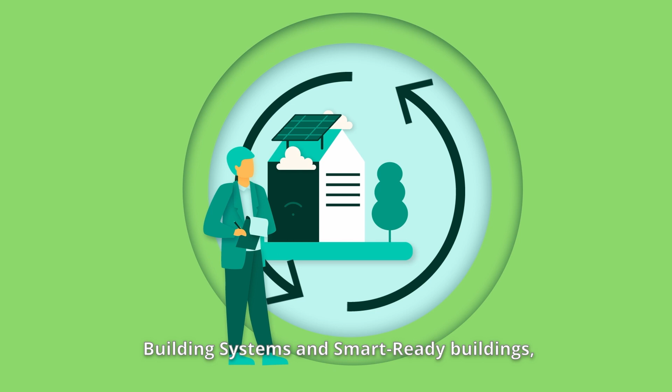Response aims to establish a strategic vision for smart cities' energy transition in a way that can be affordable, secure and sustainable. Response solutions are comprised of 5 pillars. The first pillar involves the demonstration of energy-efficient building systems and smart-ready buildings. For example, the energy consumption for cooling and heating houses will be lower.

The second pillar involves the decarbonisation and smartification of heating and cooling networks. The third pillar deals with heat storage, providing flexibility to the electricity systems. The fourth pillar is to use information and communication technologies to manage energy, e-mobility and e-governance. The fifth pillar tries to engage with the population to actively participate in moving towards resilient and safe cities, enhance citizen participation and raise awareness, and also improve the resilience of cities, social justice and security.

Dijon in France and Turku in Finland are the lighthouse cities for this pilot project, which will have a duration of 5 years. In both cities, the project will demonstrate various solutions. The solutions implemented in the lighthouse cities, Turku and Dijon, will be replicated in the project's fellow cities: Brussels, Zaragoza, Botoșani, Ptolemaida, Gabrovo and Severodonetsk.

In 5 years, Response expects positive impacts in the lighthouse cities as a result of decarbonisation. It's expected that greenhouse gas emissions will be reduced by 40% by 2030 compared to 2020, and by 85% by 2050. The increased use of renewable energies, waste heat recovery and storage solutions, including batteries, and their integration into the energy system, will improve energy efficiency and air quality.

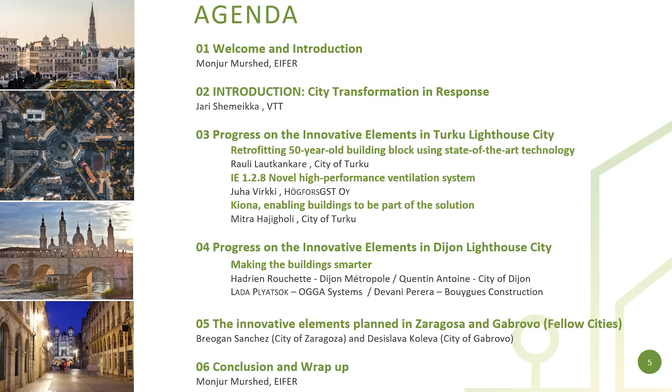So my name is Jari Shemeikka, and I'm from VTT, which is one of the partners in this response project. I was a task leader when we reported this master planning of these building solutions. Next slide, please.

I will repeat a little bit what the video had already shown. The only thing you really need to remember is that this kind of city transformation, when we are making carbon reductions and everything, it's not just the technical things. They are important, but there is always the citizen focus, because these are the cities where people are living, their living environment, so the engagement of people is really important. Also the policy and regulations are things that need to be considered—should we change something, what should be done better—and that kind of thing at the city level.

Then we're talking about smart city transformation. Smartness is usually something digital, usually city information platforms, digital solutions, communication across boundaries, because traditionally cities have been silo organizations where each has their own things, and usually the ICT systems don't talk to each other—that's one of the targets when you make better cities. Finally, the business models are important, so that beyond the project it's not just a demonstration. There has to be real good business for the companies for the coming years after the project.

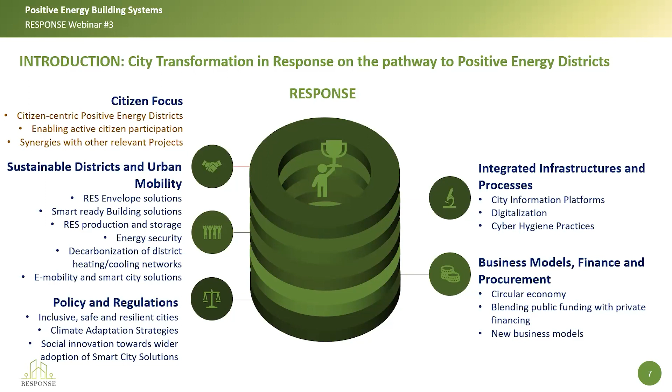This is how this mindset materializes in the response project. As mentioned, we have this transformation axis—lots of acronyms here, but these show how it's materialized at the project level. The first three, TA1, TA2, and TA3, are the technical ones. Then comes the digital solution, TA4, and the citizen engagement and that kind of thing in TA5. All of these contain so-called integrated solutions.

Today we are focusing on that red rectangle, TA1, positive energy building systems, which contains building-level renewable energy production. That's one topic. Then we concentrate on items related to, for example, deep renovation—what to do to lower the demand. There are two things: increase the renewable production and minimize the demand. These are two tools to handle the positive energy districts.

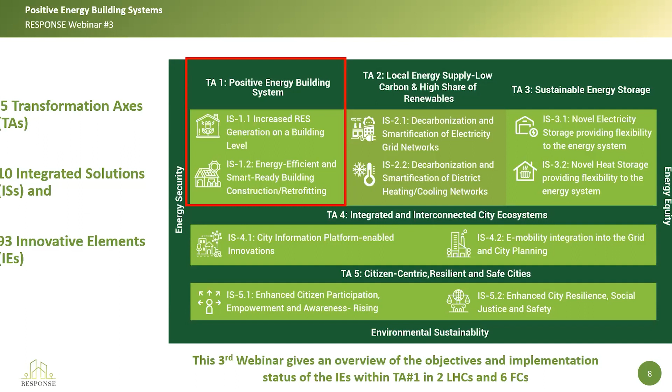Now we can continue with a deep dive into TA1. Next slide, please. So what is TA1—this transformation axis, this slang of the response project—positive energy building systems? What are we doing there in practice?

The target is to find high energy efficiency at the building level, but also remember that good indoor climate is really important for the people living in the buildings. We are not building buildings for technology's sake—we are doing those for the people. In Turku, we are making a new building which is highly energy efficient, and deep renovation activities, which the next speakers will drill into in real detail, showing how it's been done with these innovative elements. But mainly, at the building level, it's about how you do renewable energy production.

Solar systems are close to commercial or fully commercial solutions nowadays, so that's what we do here: increasing renewable energy production, deep renovation activities such as better insulation, better windows, and fancy exhaust air heat pumps, which are quite common in Finland. Smart digital solutions are used for better control of the indoor climate when people are present or absent, optimizing energy efficiency while securing good indoor climate for people. The next speakers will tell you more about that. Next slide, please.

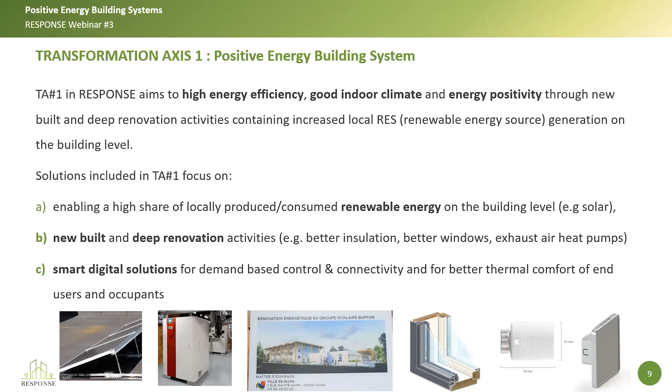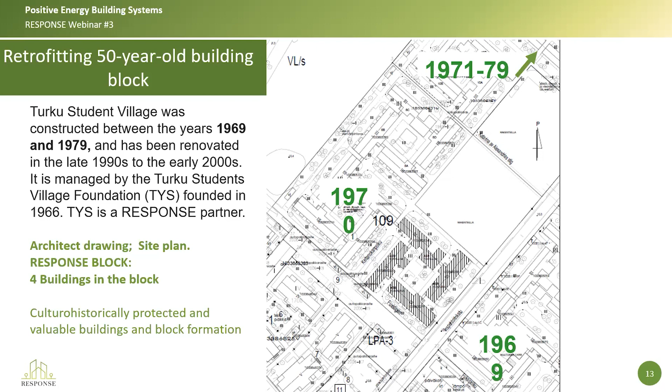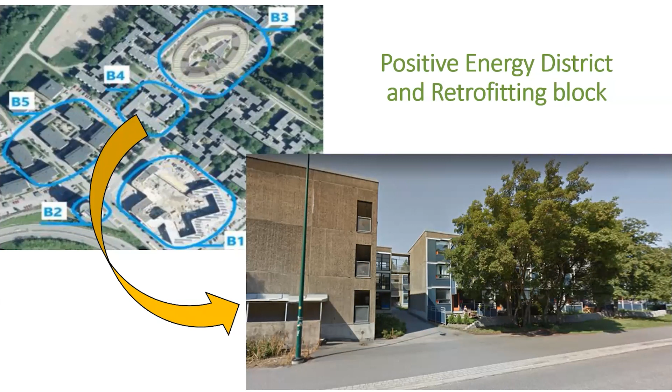Next slide please. On the left side, you can see the whole positive energy district, where the Response project targets all the actions, and B4 represents the 5th block buildings in our demonstration area. On the right side, a picture in situ - buildings have 3 stories. Next slide please.

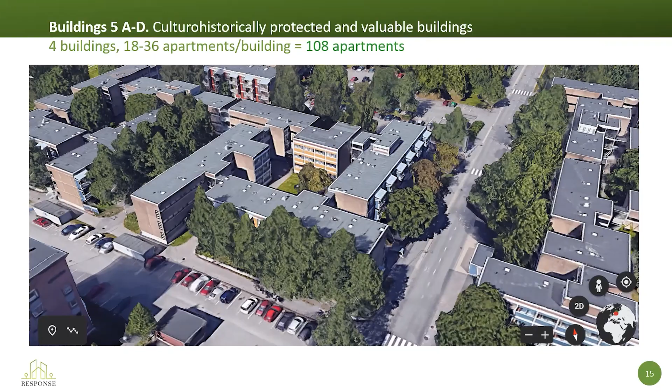Next slide please. Retrofitting solutions are gathered here. There are 4 main solutions presenting state-of-the-art technologies, and 1 conventional retrofitting solution module.

The first innovative solution is nanocoating four-glazing windows provided by partner Ruhkala, a Finnish window company. The second is a novel high-performance ventilation system, which will have a detailed presentation after my part by Högfors GST. The third solution is novel human thermal sensation control, which will also have a detailed presentation by partner Kiona. The fourth solution is self-sufficient IoT thermostats. The fifth is conventional retrofitting, including water-saving taps, extra insulation to the roof, urethane sealings, mainly tightening and sealing wall connections, and PV panels on the roof.

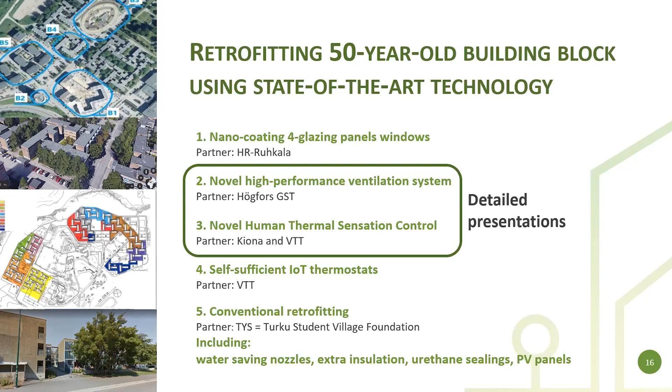Next slide. The first solution to present in our demo buildings is nanocoating four-glazing windows. They aim to increase the energy efficiency of the existing buildings. Top-class energy-efficient windows have 65% better insulation value than the existing windows. The nanocoating forms a frost-free outer glazing and visual comfort for the resident.

The state-of-the-art energy efficiency of the window provided by partner Ruhkala is based on the thermal break used in the exterior frame and the glass structure offered by modern glass technology. The thermal break and current selective glass coatings have improved the U value, the insulation of the window, by about 30% compared to previous 4-glass window generations. The expected installation time is 1 workday per apartment in these 5th block apartments. After Response retrofit, the windows' thermal insulation is even better than the walls have, because the walls are still 50 years old.

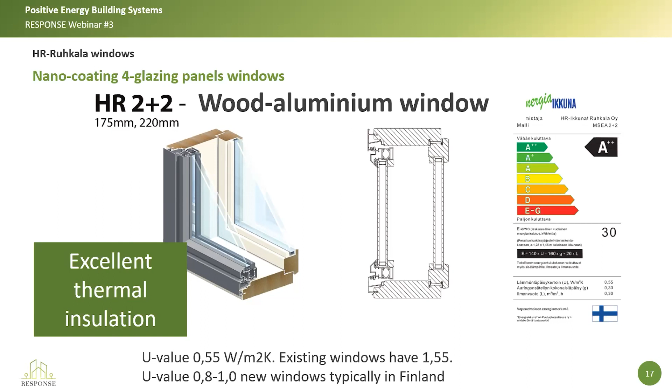Here you can see the situation picked last week. Windows have been replaced in half of the apartments. After the window renovation, energy is saved 65% compared to old windows. Savings per window might be small, but after replacing all 250 windows, the impact grows respectively.

Considering the situation and impact, if all the 91 buildings in this area built in the 70s would have these windows, or 1.2 million Finnish small houses and 300,000 other buildings have these high insulation windows, that would make a difference. And of course, buildings in other subarctic countries as well.

I want to emphasize that even small improvements will carry us closer to a better future, because they are drops in an ocean that can be multiplied and scaled billions of times.

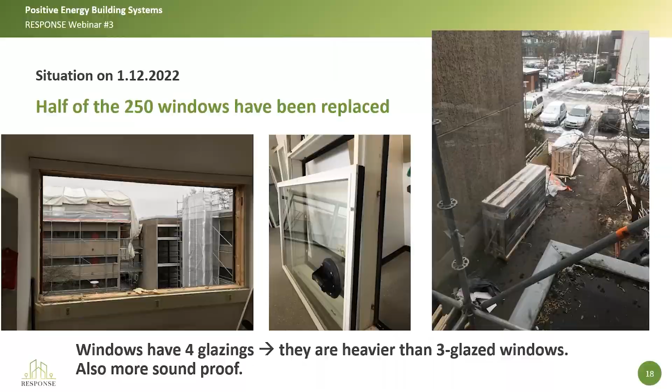Here's some facts about the company Ruhkala that provides the state-of-the-art windows. Ruhkala was founded 65 years ago. It is located in middle Finland, as you can see from the map. They have 26 employees and they manufacture 20,000 windows a year. So it's a small size company that provides excellent windows with an affordable price.

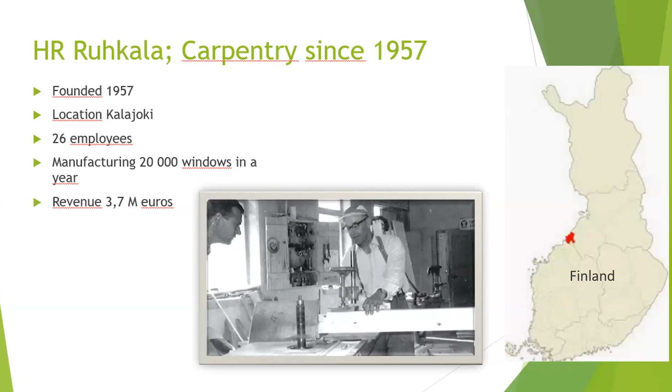The Student Village Foundation has made some conventional retrofitting with their own funding, at the same time as other renovation measures. Here you can see work done adding insulation on the roof. On the left side, before the extra insulation; on the right side, after the insulation work.

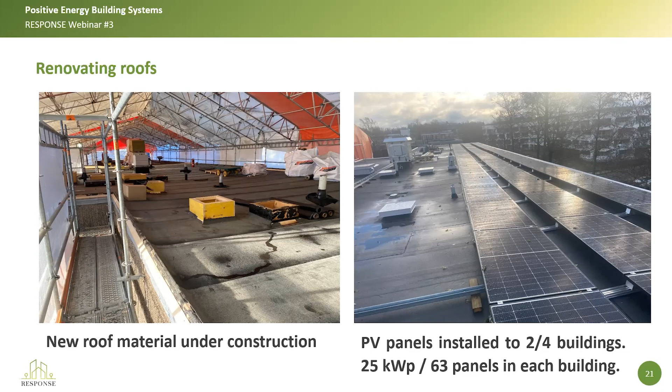Thank you, Rauli. I'm trying to start the video, but it doesn't let me. Just a second. You can't start your video because the host has stopped it. Okay, I can go without the video then.

Welcome to you all from my side as well. Do you hear me? Is the line okay? Yes, we do. Okay, thanks. So you have my show over there. Do you have it? Should I share it myself? No, it's displayed, you just have to ask to change the slide. Okay, you can change the slide.

My name is Juha Virki and I'm representing a company named Högfors GST. Today's topic is the high performance ventilation system. I have roughly 9 minutes to get through it, so I'll try to be as fast as needed.

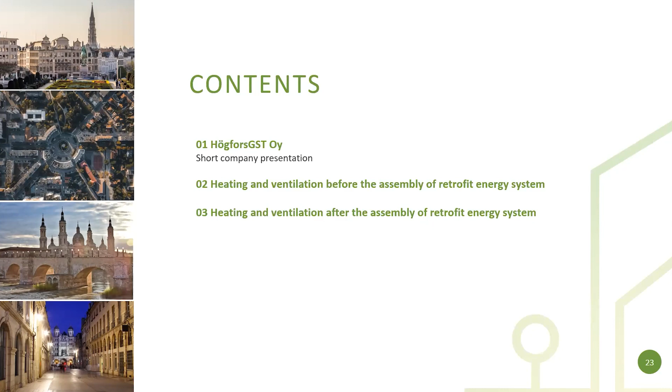A little about us: we are a factory located in Leppävirta, and we export district heating and cooling subcentrals and hybrid solutions to Sweden and Norway, as well as producing them in Finland. We have about 150 employees and turnover is about 30 million.

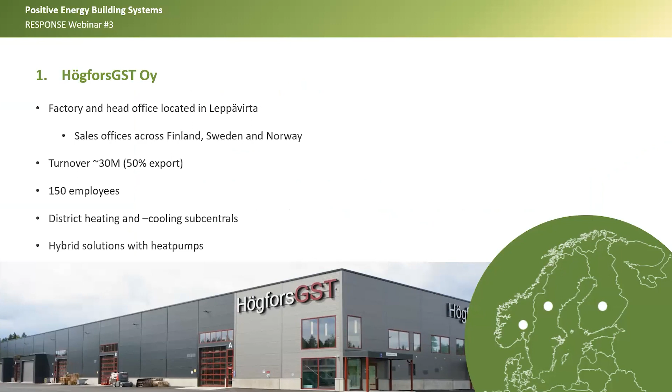The situation before renovations, as Rauli said earlier, is that these are old houses and the typical ventilation is like this: we have only exhaust air ventilation. In this case we have one of those on each of the building rooftops. And when we have only exhaust air ventilation, the inlet air comes via vents which are on the rooms.

The problem is that when we have, for example, minus 20 degrees outside, the temperature coming into the building is at the same level. And of course this gives big energy losses and lower living quality.

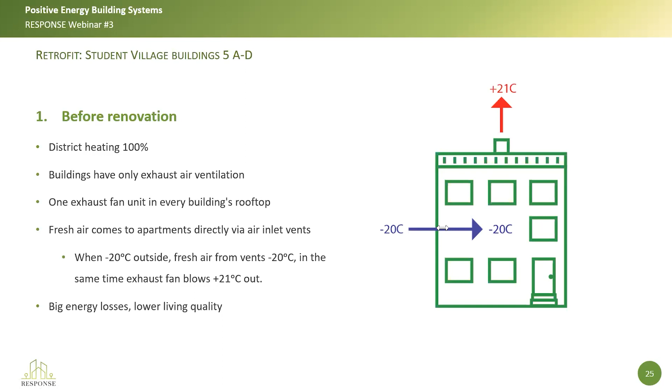And what we are now doing is trying to change this. Let's go to the next slide.

Instead of taking the cold air directly from outside into the rooms, we are heating it up with inlet air units. That means when we have minus 20 outside, we can still blow, for example, plus 18 inside the building. That gives much better living quality.

At the same time, when before we were blowing out this plus 20 degree air, now we can blow much, much colder air out. That means when we take the heat out of the leaving air, which was plus 20, that results in a lot of energy savings.

In the upper picture you can see, well, we have quite cold temperatures here in Finland, this is something we can have. This is when the normal ventilation, between the inlet air unit and the exhaust air unit, is working only without the heat pump.

But when we have higher temperatures outside, for example plus 10, then we can bring the heat pump into the system to give a boost for the ventilation and for the recovery operation.

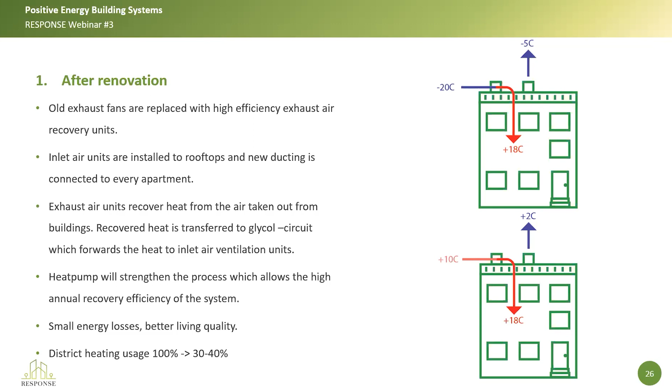This gives smaller energy losses and better living quality. It also has the possibility to cool down the inlet air when we have hot outside temperatures, but in this case we are not using it because of the ducting. If we should use the cooling, we should have different ducting inside the building, so in this case it's not possible.

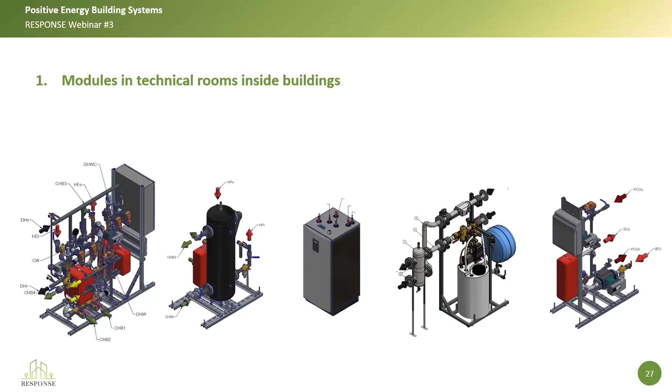Then we have the ventilation units. There was a picture in Rauli's presentation where you already saw one of those exhaust air units. This exhaust air unit cools down air that's going out from the building. Normally when we have plus 20 degrees inside air, it cools down to minus 5 when we have cold outside temperatures, and when we have plus 10 outside, it cools down even lower than that outside temperature.

For example, plus 2. And on the right side we have the inlet air unit, and this is the one that heats up the air coming inside to the building.

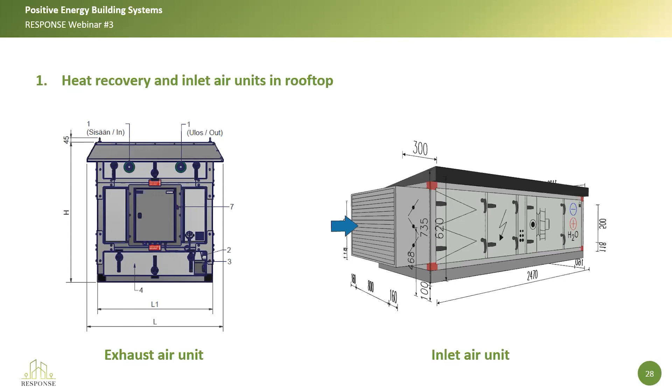When we have a lot of different modules, heat pumps, heating circuits, ventilations, etc., we have to have a control system that can control everything. This is something that we are doing as well in our factory, and when I talked earlier about the factory testing, this is a big part of it, because before we send the products to the site, we test everything including this Fiksu system as well.

So actually the automation is working already before it's installed. With this control system, we can get all the consumption reports, for example how much electricity the system is taking, how much heating power it's producing.

Everything can be controlled via internet. So for example, if you have a cell phone or computer or whatever, you can control the whole system by using those.

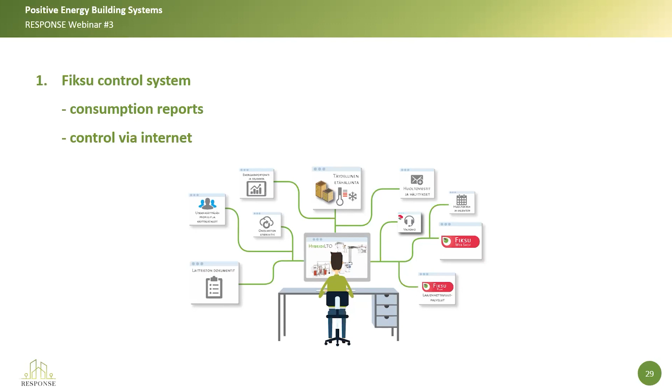This is the flow chart. It's maybe a little too difficult to explain, but just to conclude: this system is a prefabricated system in our factory, and it consists of different modules that are connected on the site. You don't need to think about every module, every product, every vent differently, but everything is already done in the factory.

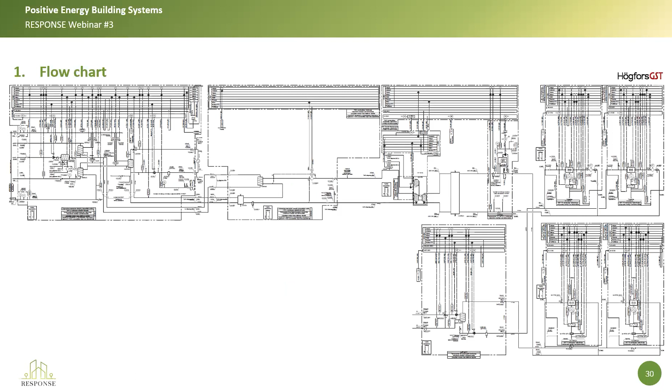Next slide, please. Oh, that was all. Thanks.

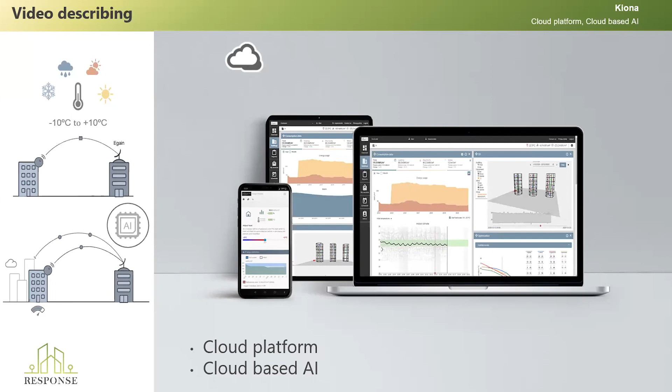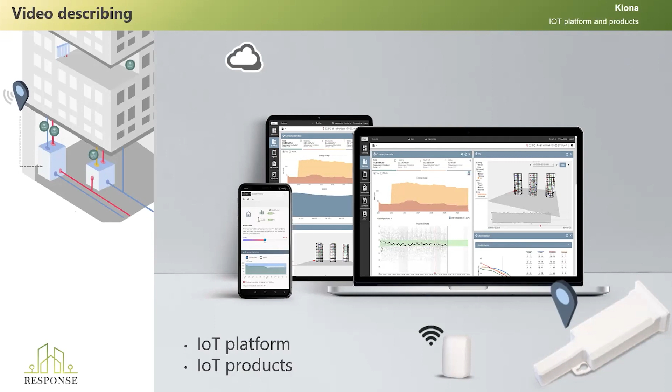Next, please. With the Edge platform, we have an IoT platform built to deliver value fast. It should be easy and quick to install, so that we can spend as little time as possible on getting started and instead deliver data and results. Kiona Edge is hardware independent and can be integrated with existing hardware infrastructure, enabling access to data without sunk cost. Next, please.

Now let me walk you through the solutions Kiona is part of in Response.

For the Response project to succeed and reach climate neutrality by 2050 in Europe and by 2029 in Turku, we need partners, decision makers, and citizens to collaborate. We need citizens to understand how much their behavior costs in money, energy, and CO2 emissions. We at Kiona believe that a knowledge platform reachable from your phone is a good tool to increase citizen awareness. Here are some examples of what it can contain.

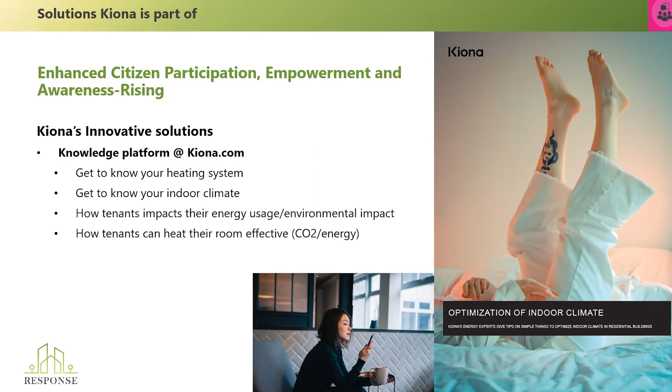To create a connected city ecosystem in the Response project, a city information platform is needed for decision makers. In this solution, Kiona will offer a dashboard to understand how efficiently the building is distributing and using the incoming heat over time. The dashboard will present benchmarking on building, but also on area level, to understand how well your building performs compared to other similar buildings.

It will also present the health of the heating central, which is based on district heating temperatures and energy consumption. And to find new, surprising, unexpected events or behavior in district heating temperatures, delta T, Kiona offers a rule-based anomaly detection tool to detect these deviating values from what is expected or normal.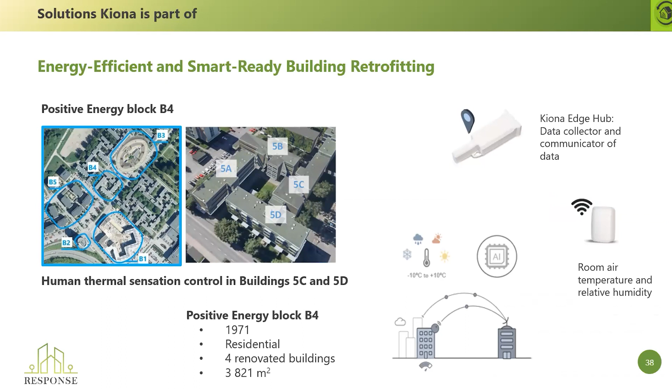The human thermal sensation control is about keeping tenants satisfied with the indoor climate. The algorithm decides the indoor climate based on body type, and uses the indoor climate data provided by Kiona.

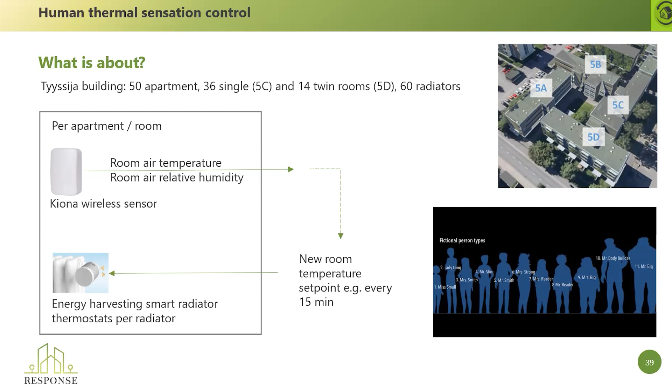However, the solution is also about optimizing energy consumption, improving our edge AI to the next generation, and cutting power peaks based on the energy tariff model set by Turku Energia. Kiona's self-learning optimization calculates the building's heat need based on the predicted weather forecast, but also on the maximum indoor climate set per thermostat. Kiona will have the final control of the indoor climate to be able to cut any power peaks and redistribute the heat over time.

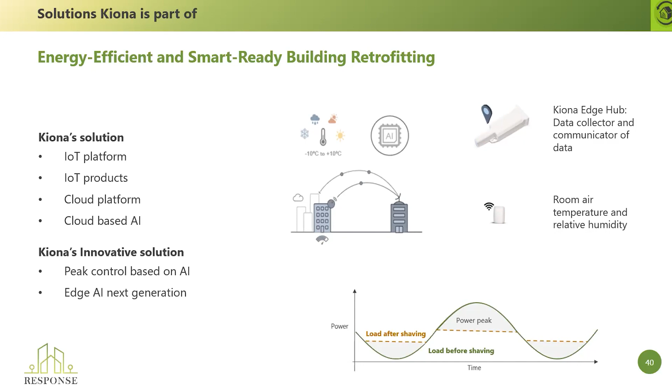And here you can see a summary of what we will develop in the Response project. If you have any questions, please write in the chat. Thank you.

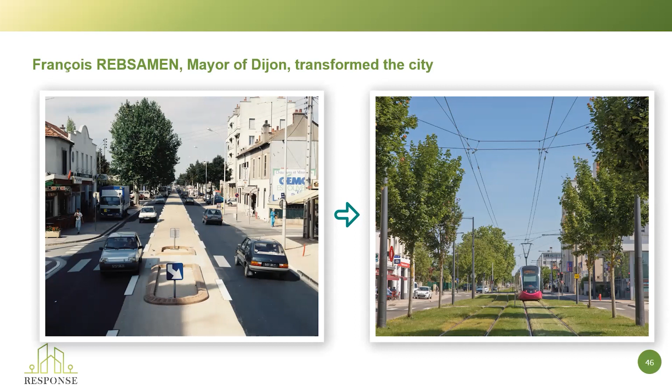Although it is rather old, it has been reinventing itself since the early 2000s. For example, we have now the tramway, we have the pedestrian zones. So here you can see the new pedestrian zone, which starts at this crossroads and goes through the district that we can see in front of us on the right side. We also installed a heating network during the very same works during which we had the trenches for the tramway.

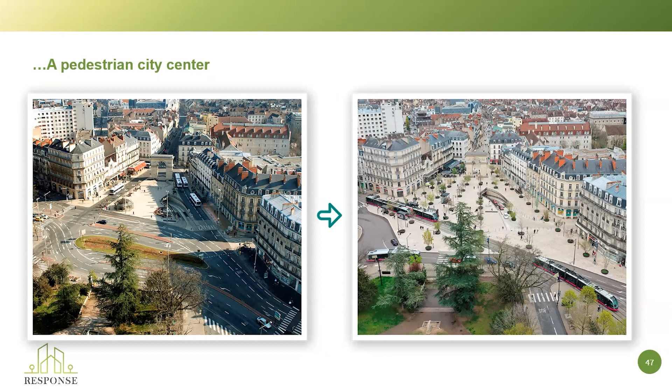In 2008, Dijon signed the Covenant of Mayors, and in 2019, Dijon voted for carbon neutrality starting 2050. So these here are the representation of the goals for Dijon. And in this scope, the Response Project is one of the testing ways for the transition project for Dijon, and the reference pilot project in Dijon for energy transition.

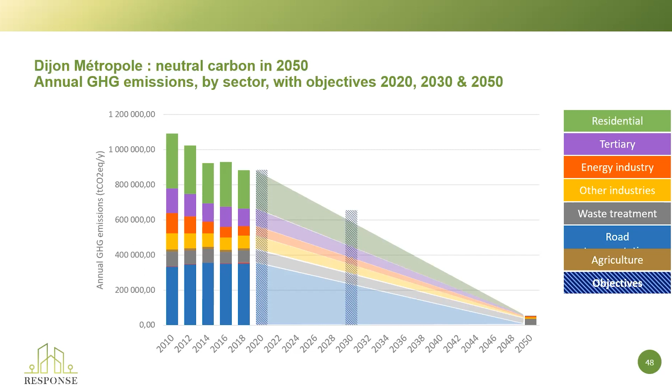For this one, we chose the Fontaine-d'Ouche district.

This district, southwest of Dijon, was built in the late 60s and early 70s, and it's called the Fontaine-d'Ouche district. It is home to a bit less than 10% of Dijon's city population, so it's not a small one. It has a particularity of hosting a relatively high level of poverty compared to the rest of the city. As a consequence, the Response project in Dijon is an opportunity to test energy transition in a district for all citizens, which is rare.

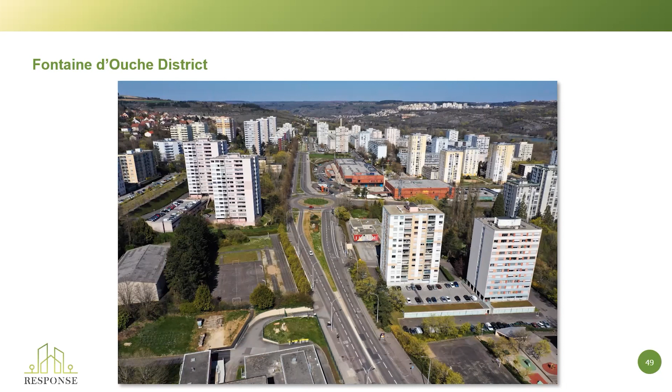The district is located next to the lake Kir, K-I-R, which is a favorable and pleasant environment for the people.

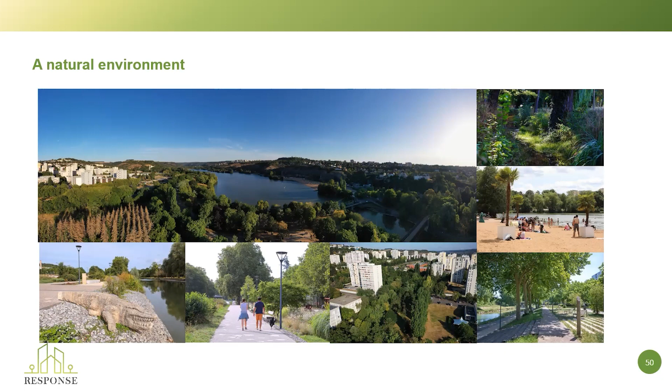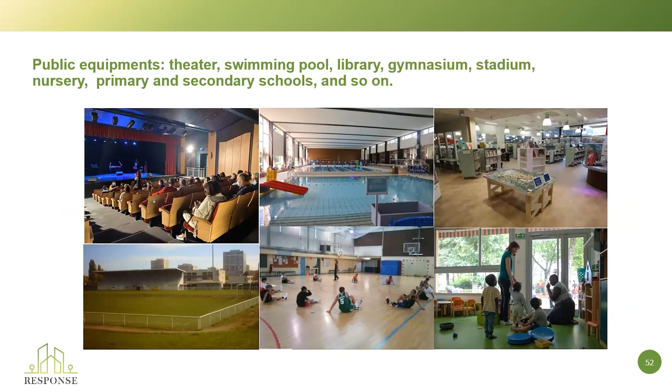The district also has many facilities in the neighborhood, for example the commercial center. In the next slide, we will see the sports center, the theater, and the swimming pool. All the buildings are heated with the district heating network.

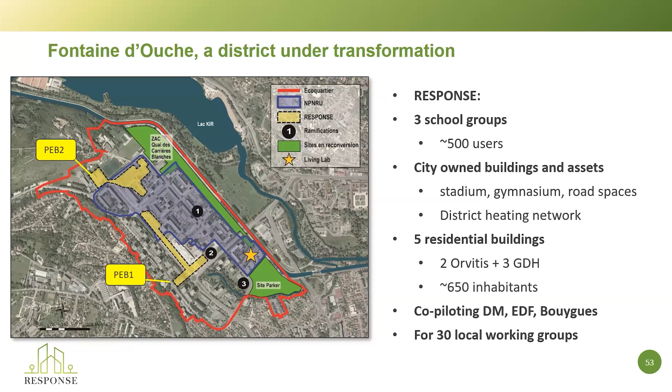Even before the Response project, the Dijon Fontaine d'Ouche district was already under transformation. This blue zone has already been experiencing transformation since the middle of the 2010s. Now we have the Response project, developing in the two yellow zones, the two PEBs, positive energy blocks. Those concern 3 schools, 5 residential buildings, 2 sports facilities, the road spaces, as well as the district heating network.

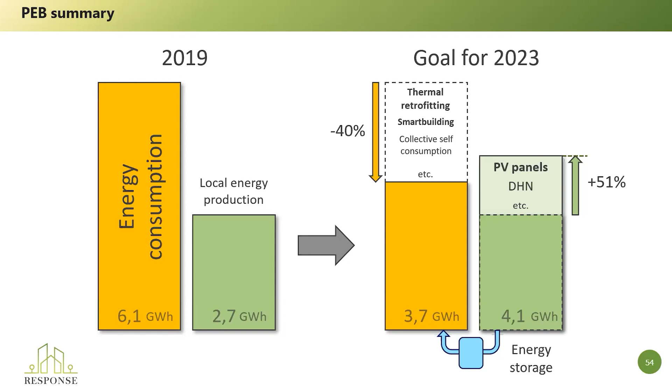The goal of the Response project in Dijon is to go energy positive. On the left we have the reference, with energy consumption and production in the district, and on the right the goal for 23-24. The first lever to reduce the need for energy imports is to reduce energy consumption directly at the root, shown by the orange bar. At the same time, it's also possible to produce energy that will be directly consumed in the district, shown by the green part with the PV panels. I'll give more information about this in a minute.

So let's go see the district. You can already visit the Positive Energy District in Dijon through a digital model available online with a link or QR code.

Let's start with the residential buildings, home to more than 600 people. These buildings are property of the social housing building owners, Grand Dijon Habitat and Orvitis, who are partners of the project.

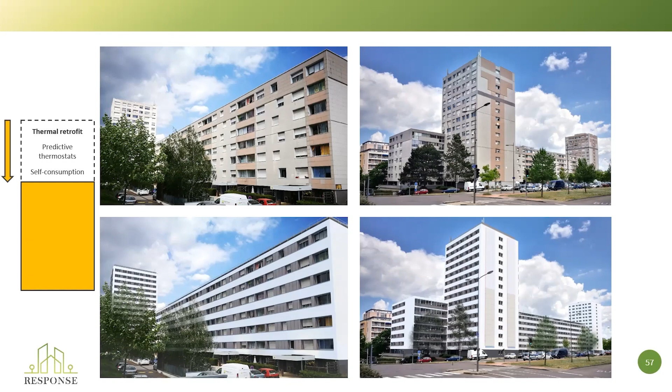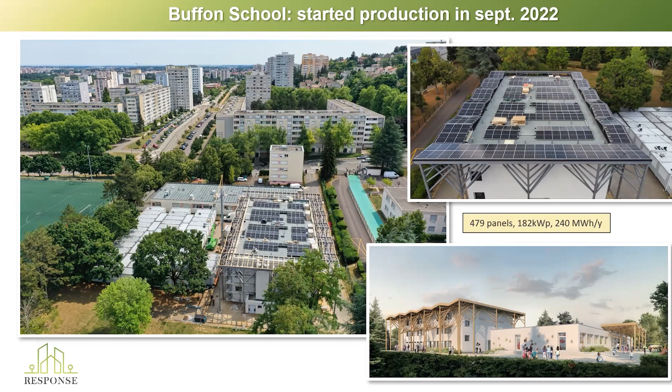It's common during the day to have more production than the needs of the school. Due to the self-consumption law set in France, we can share this electricity produced on the building with other buildings owned by the city, such as the other schools or the swimming pool. This facility has been running since September 2022, making it one of the biggest achievements of this year.

Another example is Colette School, currently undergoing thermal retrofit, which will reduce energy consumption in both heat and electricity. This school can get some electricity from the 2 other schools equipped with PV panels. As a consequence, the schools and residential buildings of the program are being equipped with these technologies, along with various smart building technologies that will further reduce the energy needs of those buildings.

So, for example, the schools will get innovative systems for managing both the heat and the air quality. Bouygues Construction Company will provide predictive thermostats to the Orvitis buildings, and OGA company will provide smart energy management systems to Grand Dijon Habitat dwellings.

So we will hear from them, because they are actually the specialists. I'm not, I'm just the project manager. As a consequence, I propose to give the floor to Lada Pliatsok for 5 minutes, about the OGA solutions that will be deployed in the Grand Dijon Habitat buildings. Lada, please.

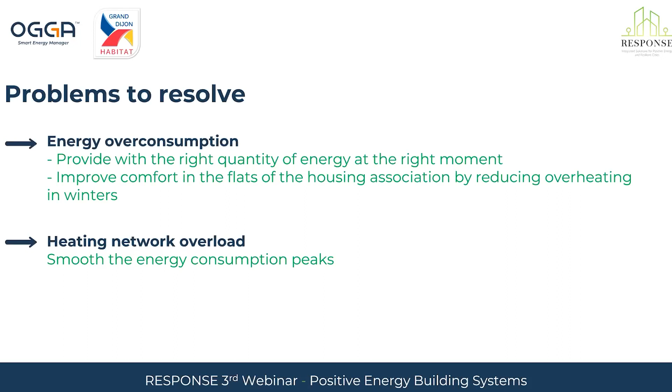In the flats, to avoid overconsumption, we will install our smart home solution EcoTouch, an energy manager. It's a small module installed in the electrical panel of every flat that measures and analyzes energy consumption and learns the habits of the people living inside. According to these habits, it automatically regulates energy consumption. To help them use the system better, they will have a wall switch to set the temperature they like, and the system does the rest.

To help us learn their habits better, and to get more energy savings, there will also be a wall switch near the entrance, a presence and absence button. When the person leaves, they push the absence button, the lighting goes off and the heating is reduced. When they come back, they press presence and everything returns to normal. The system is simple and easily used by any tenant of any age. The heating is operated automatically depending on habits and the weather, with no programming needed. Installation is very fast, less than one hour.

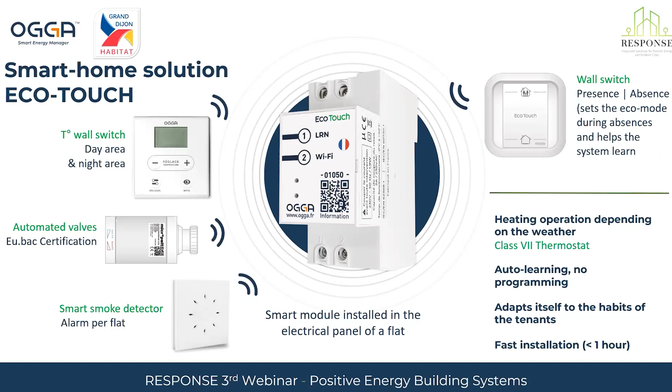Another interesting feature is the automated thermostatic valves installed on each radiator near the windows. We detect window opening, so if someone opens a window in winter, we can cut the radiator near that window, avoiding overheating. We also sponsored the certification of this valve, allowing housing associations to get significantly reduced installation costs. That's also a thing to remember.

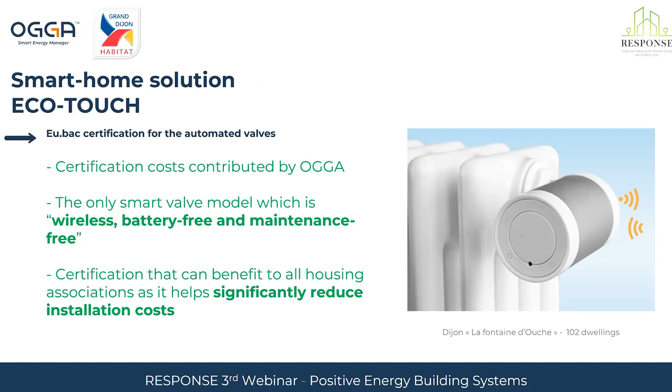So now we will be shifting to the smart building part.

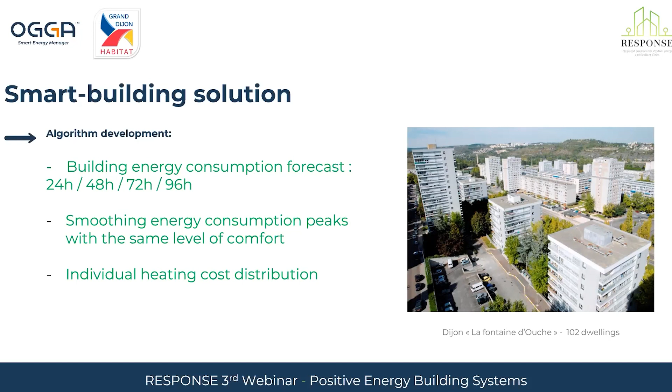The second problem will be tackled in this way. To avoid overload of the district heating system, we will be able to forecast exactly when there will be a peak of consumption, for example in 24 hours at 6 in the evening. According to that forecast, we will smooth energy consumption by telling the systems in the building to launch the heating a little earlier or later than the peak, so we can smooth the peak and avoid launching another power station. So I think that's all for me for now.

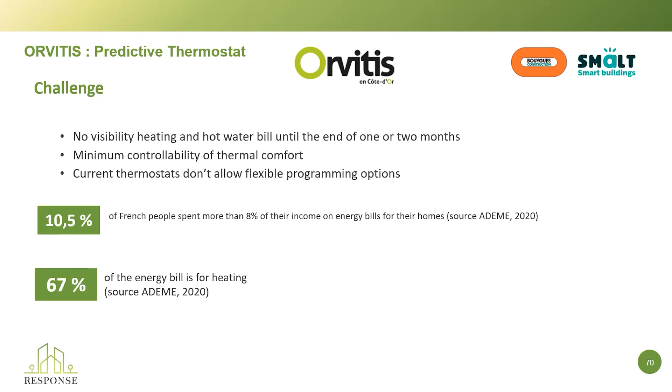So by having better visibility on our energy bills, what we would like to do is give controllability and reduce the energy poverty that is getting more and more common today, and of course do all this with a user-friendly interface, so that it's a solution that can work for people.

If you get into the details, it's a little different compared to the other solutions presented here. There is an algorithm that predicts the user behavior. The network gateway collects all the data, and using artificial intelligence and an algorithm, it is able to predict user profiles, which then provide us with their impact on energy.

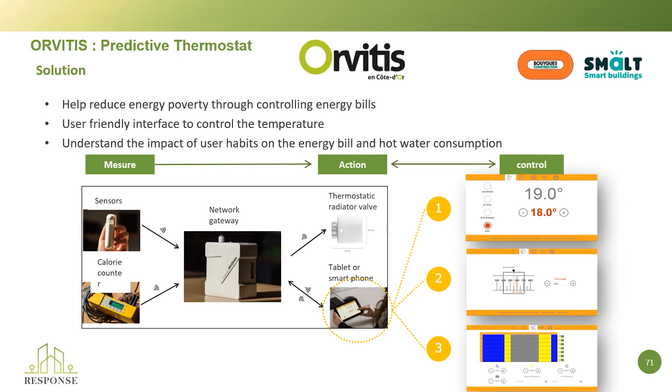If you go to the next slide, we'll see the type of screens involved. These are typical screens found in a lot of connected thermostats today—a user-friendly format where we change the temperature, see the impact on the energy bill, and set all the set points, which is becoming more and more standard in the market today.

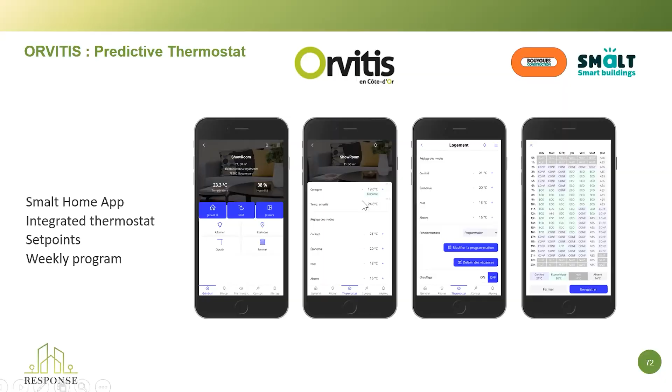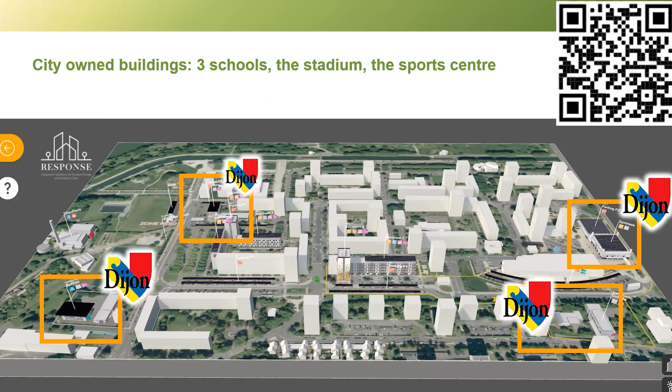Thank you, Devani. So not exactly the same solutions, but some ideas in common. Just before, we had this slide about those four sites: three of them are schools, and the last one is the sports center, on which Quentin is working for the city for the smart building solutions, the third solution. Quentin from the city, can you hear me? I can hear you. Is it okay? Perfect, thank you, Adrien.

So I'm Quentin Antoine. I'm working within the energy department of the city of Dijon, and especially in the Response project, I'm in charge of deploying various technical solutions for the Dijon city assets, and especially some smart buildings technology, which we are discussing now.

So first of all, the main objective of this solution, as Adrien explained before, is to create a positive energy district. So it means above all reducing the energy consumption of the buildings that make it up. But also in the school, the subject of indoor air quality is really important because of public health issues. We need to take care of the health of the people. And finally, the subject of comfort in the building is extremely important.

We need to take care of the comfort of the people using the building to make them actors of the energy transition. So it's an essential prerequisite of the acceptance of energy performance, I think.

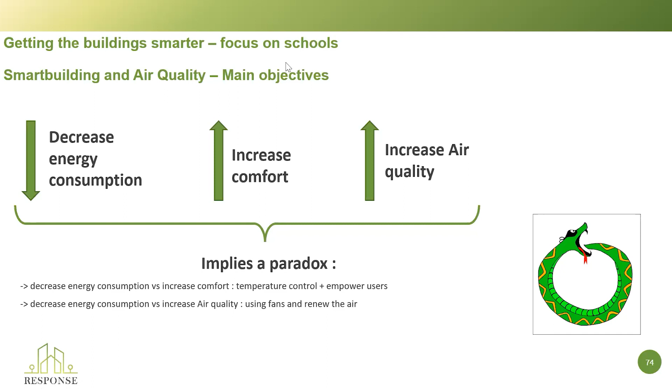So we analyze these three problems, and with it we are faced with three equations, which by their nature are opposed to each other. So it's a big paradox to decrease energy consumption, increase comfort, and increase air quality. Next slide, please.

To improve air quality, buildings must be mechanically ventilated, which means that fans consume electricity and energy is lost through the air. Finally, in order to guarantee optimal air quality, the sizing of the ventilation can sometimes lead to uncomfortable feelings of air movement. So it's really difficult to make the three problems work well together.

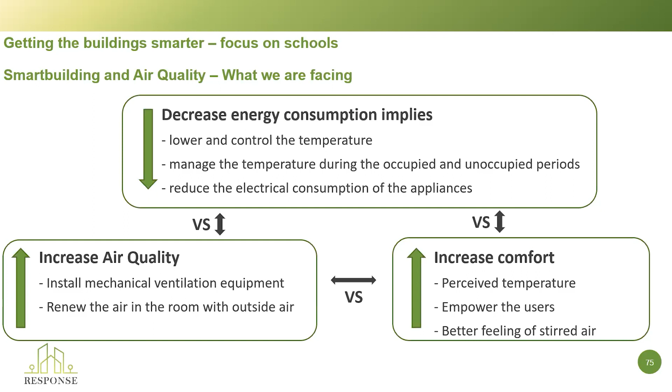Next slide, please. So the problem we're trying to solve is the following: how to improve the three points explained above while ensuring a balance of treatment between the three points.

We're deploying a solution with two industrial partners in the project, NanoSense and Alizolo. This solution is based on different points. The first point is the installation of room-by-room heating control equipment. We need to control perfectly the heating in each piece of the building. The second point is the installation of ventilation equipment, which can also be controlled by room.

After that, we need to monitor indoor conditions using multi-factor sensors. We need to sense temperature, air quality, CO2, and VOCs. And the next step is to put an intelligent control on all this equipment. We need to make it all work well together, analyzing all the factors and activating it at the best time.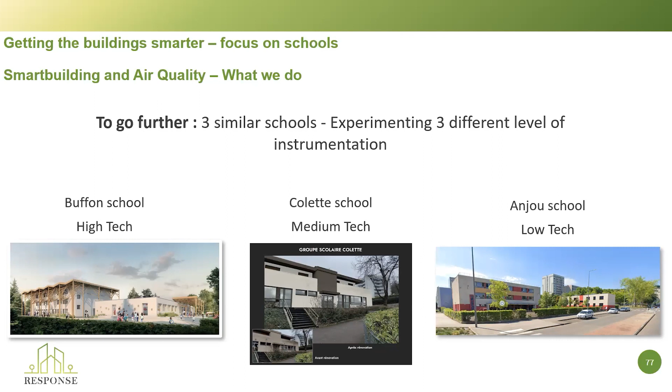Next slide, please. So to finish, just a few words about the general planning of the implementation. We are now finishing the renovation of the Buffon school, so it will be on work at the end of the year. The Colette school is now deploying, so we will start to make it work in March, I think.

And the Anjou school will not be renovated. It was done some years ago, so we just installed the necessary equipment during the next summer holiday of 2023. So thank you very much, and I'll hand over the floor.

Thank you very much, Quentin. So this was the propositions that we have on TA1 for Dijon, and we had these good presentations from the specialists. So I'm glad we had them today. Thank you, all three of you, Lada, Devani, and Quentin.

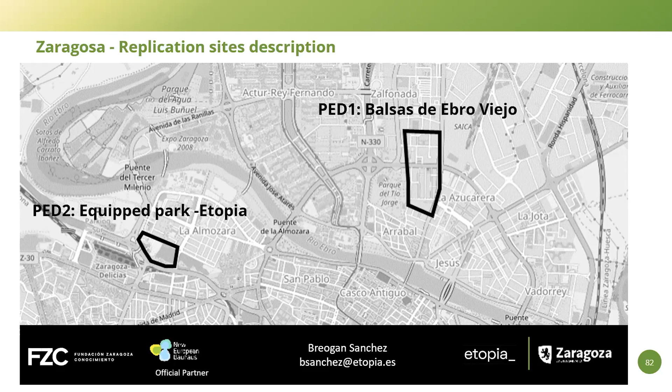Just a quick overview: the neighborhood I was talking about in PED 1 was built in the 60s and is a workers' neighborhood, currently lacking accessibility with a degree of social marginalization. The second PED, on the left side of the presentation, is an unequipped area currently used as transit among the two neighborhoods, which will have the opportunity within Response to be included as a digital layer and involve communities. Imagine how this space with that digital layer can be equipped to test new devices, new systems like charging, and all the innovations that can come to the city, interconnected in one place. I'm going to focus, for the subject of today's webinar, on PED1.

As we can see in the image, this is a building from the 60s which has been newly refurbished: insulation has been applied, and an elevator has been installed, as we can see now. As those buildings get old, their inhabitants are getting old too. Therefore, it presents a very high level of elderly people, which actually became one of the main challenges when trying to make investment, since we encounter most of the inhabitants to be against any further investment, as they no longer see the benefit of it.

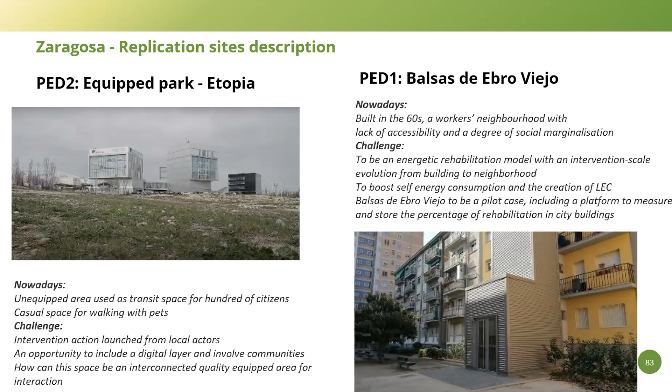So let me give you some details about this PED. The neighborhood is more or less what we see on the screen. We are counting on roughly 50 residential buildings, which can be towers of above 6 levels, or the most common type, blocks of 4 or 5 levels maximum. These are intended to be converted into a positive energy district, both by implementing renewable energy sources such as photovoltaic, mainly, but also by conventional retrofitting, which includes replacement of radiators, changing of lights, and insulation, among others.

We are in the process of creating a neighborhood office to invite all the residents and also facility users. I forgot to mention that we are not only speaking about dwellings, but also equipment such as schools, a church, or a commercial center, who are invited to check how initiatives like Response and the overall strategy for the neighborhood can help them save energy and contribute to a better city. Also, the energy provided to the system will be concentrated into local energy communities, with the idea to generate a social mechanism to take advantage of the energy that has overpassed the consumption.

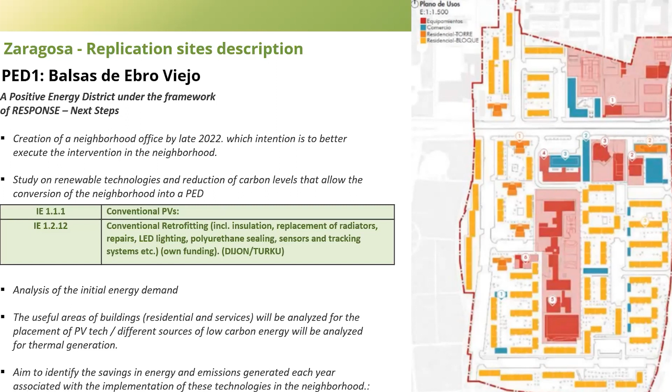Well, we are now also analyzing the potential areas in which the photovoltaic can be placed and identify the baseline level that can be saved after the next years. And I think my time is gone, so I will not take more time. Thank you so much.

Hi, do you have a moment? Okay, can you hear me? Yes, anybody, can you hear me? Yes, we hear you well.

Please go on. Okay, so I will try to be quick representing Gabrovo. For those who don't know, Gabrovo is in the very middle of Bulgaria, and it's one of the most beautiful cities in our country.

According to the project response, what we try to do is really increase the level of energy efficiency in the building, and increase the renewable energy source generation on site. In the past few months, some activities have happened.

I will start with the three most important buildings in the project. The first one is the administrative building of the municipality. Right now, we have decided which will be all the energy saving measures. We decided what the innovative elements will be, and the next step is to make the technical design of the building.

So what we decided to do is just replace the current gas boiler, construct a PV generator with around 80 kilowatt peak power. We also have to do total replacement of the heating system, implementation of an automated system for control of the heating, and partial insulation of the roofs and walls.

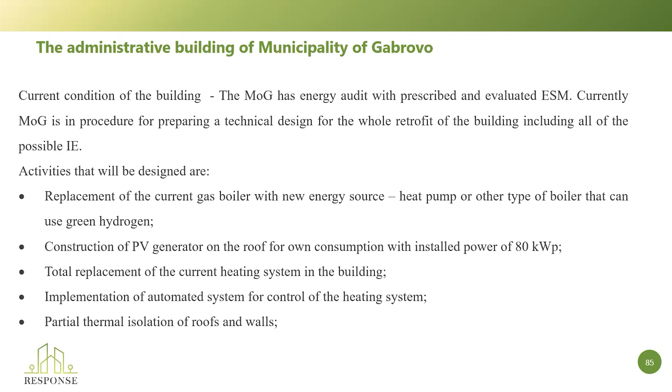Maybe you can put the next slide. You can see this is the building. We don't want to change the architecture of the building, and that's very important. One of our biggest disadvantages is the tower we have - sadly it's pointing directly south, so it reduces the PV generation we can do, but still we will manage to get a lot of power from the sun.

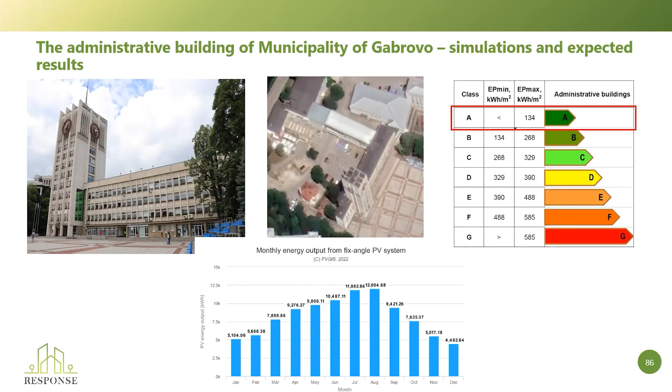The aim of the municipality is to achieve the highest possible class of energy efficiency according to our legislation, and it's not so hard to do. Maybe the next slide.

The next building is the sports hall. This is a bit more challenging building because it's very big, and right now the first thing we need to do is make a constructive survey, because we have a special construction on the roof, and we have to decide whether we can get PV panels or not. Additionally, not only for the PV panels, we are going to replace the heat supply system with total refurbishments. Maybe you can put the next slide.

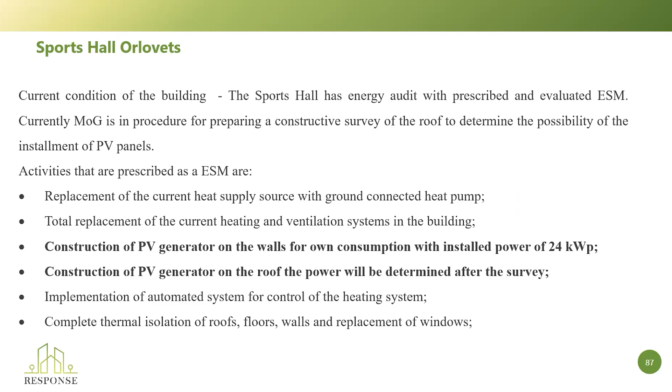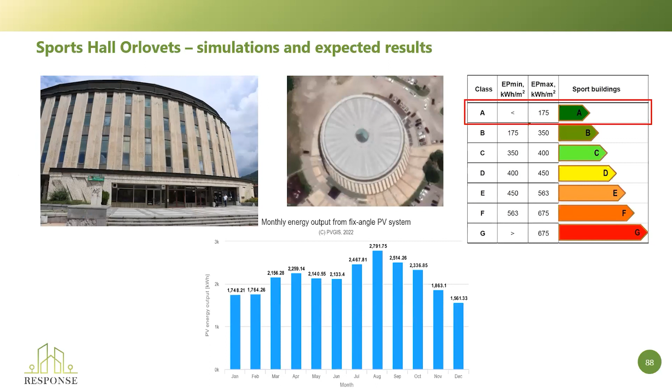This is the sports hall. You can see we can use the big roof for photovoltaics, but the exact amount will be known after the construction survey. The next slide.

The third very important building is the medical center, which is slightly ahead of all the other buildings, because we already have the technical designs for everything, and we hope that around September next year we can start implementing all the innovative elements. The next slide.

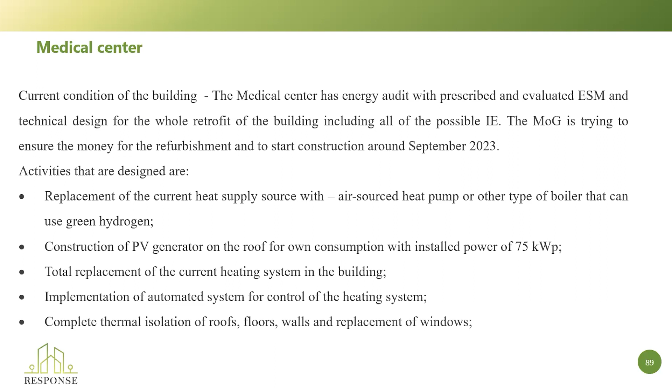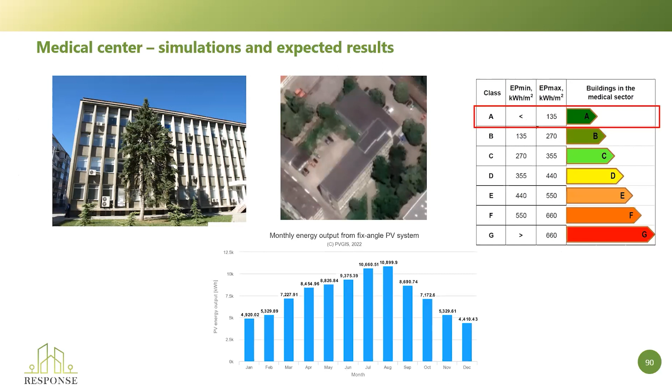This is how it looks. Again, it has some special architecture, but like every other building, right now we are trying to achieve the highest possible class for energy efficiency in Bulgaria. So this is very important.

Also, the coordination procedures with the energy operators take a long time - usually implementation of one PV system takes around 6 months, which is not really normal in other parts of Europe. This is how Gabrovo is doing right now with the response project. And that's all from me.